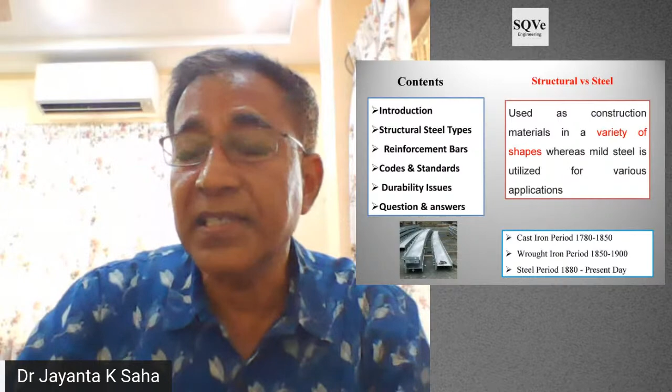Now with this, if you see the structural material definition I already mentioned, and the generic application of steel structures, it starts from 1780. There the heavy structures made of cast iron were built. I will show you some structures which were really made with cast iron, and are still surviving with full strength. Then wrought iron products were also developed parallelly. And then finally, we are talking about the steel period, where most of the structures are made with different grades of structural steel that we will discuss.

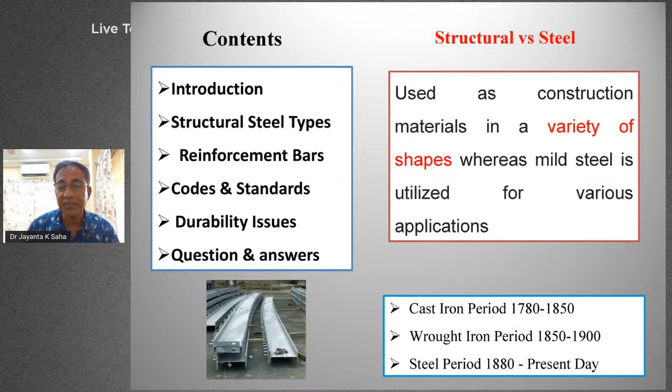Now, this is a very obvious fact. When we are going for any structure, there are four important things. We ask the architect, kindly give me a design that stands out from the existing structures. So we talk about aesthetics. The Burj Khalifa, anyone can like that building. If you see the tallest structure before that, it was equally elegant, but feature-wise the latest one may be more. So the continuous thrust is there, making structures aesthetically very pleasant.

That's why steel is one of the options, because you can make it in different forms, different shapes, and different dimensions. The second one is cost effectiveness, definitely, otherwise the material will not be sold. And then the third and fourth are the safety requirements and durability, that is, the maintenance free life of the structures.

So in all four of these most important aspects, the common factor is the material. If the material is good, and you give a good durable coating on the material, durability is high. For safety, if the weld material is good, then the structure has more safety. If the fireproofing material is good, then the safety of the structure is also good. So the common thing is the material part.

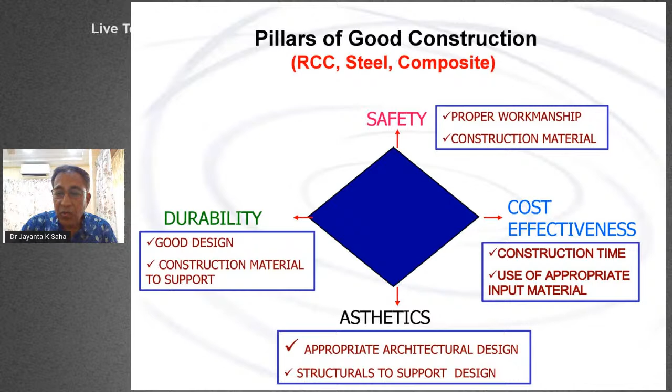And if you see this historically, starting from 1779, the structures were very bulky and aesthetically not elegant. Then in 1974, the Sears Tower, now called Willis Tower, in Chicago, USA, was made with medium strength structural grades of steel, 250 and 345. Now think about India: we are still following a maximum of 250, and there are limited cases where people go for 410 grades of structural steel.

The reason behind what I'm showing you is that the higher the grade of structural steel you use, the lower the material consumption of the structures will be. But there is again a chicken and egg story: these high grades of materials are not available off the shelf with the steel manufacturers.

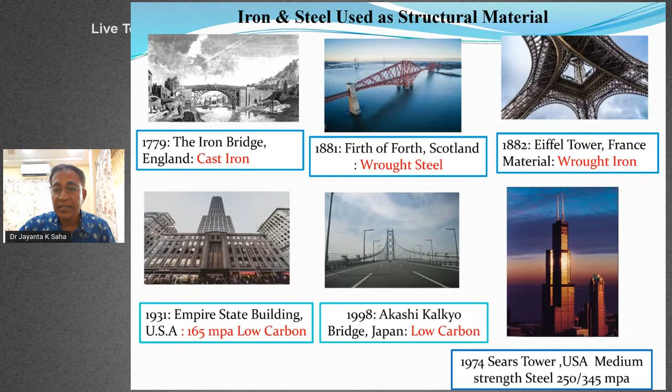That's what I am not using. But on the other side, the steel makers say that if you give me a lead time, I'll make steel up to 650 MPa values as per 2062. Think about the 2062, there are grades we'll discuss, but we are still at the entry level. We are operating most of the design activities at the entry level of materials as per the codal provisions.

Now the structural steel classification, I have made it in two. One is the plain carbon and the alloy steel. In the plain carbon, it starts from the carbon level up to 0.25 and 0.25 to 0.65. So here again, mostly the reinforcement bars are falling. 0.3 is a higher range of carbon, and other structural steels are mostly within 0.25.

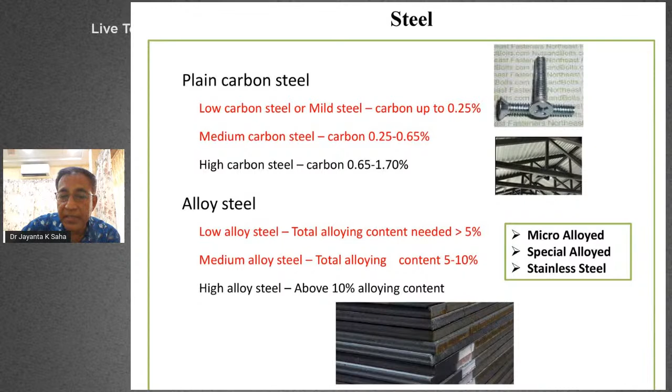And other structural grades of steel, when we talk about the alloy steel, if it is more than 5%, here we call it like HSLA, high strength low alloy, fire resistance steel, weathering steel. All these are coming under low alloy steel. And the medium alloy steel is like stainless steel, maybe the duplex grades that we will discuss subsequently, a little bit on that. And I think there are a few questions also on both the topics.

Now, at the beginning, when we are making a tender document, what should we look for as an owner or as a professional? The first thing is the quality considerations of the material. So the architect has given you the material attributes. These are the materials. The UTS value should be this. The hardness should be this. Bendability property, or if it is a dynamic structure, it should be the fatigue loading or the fatigue life of this. Then weldability aspects, all those things are defined.

Now, apart from that, as my friend Mr. Bhavin has already told, after the pre-feasibility, we go for the basic engineering. And in that basic engineering, there are certain questions you have to ask. These are the questions I have just put here. The first one is the chemical compositions. We have to find out from the major manufacturers. Nowadays, these things are available on the website. These grades having what chemical compositions.

The two important issues here are the residual impurities. The quantity should be less, the gaseous content should be less, like oxygen or nitrogen, and at the same time the trace elements. Then the homogeneity, meaning the micro and macro segregations. These are some of the attributes you can get from the material with eyes closed when you are buying this product from a reputed make, or where the technology has a very proven status. Okay, so this is the first one you have to remember. The other things I have just mentioned. If you are interested, you can get a copy of this presentation material. This can also be shared with you.

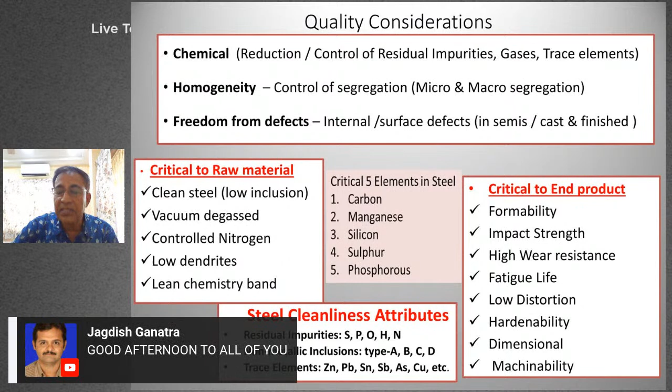And the last, not the least, is steel cleanness, impurities like sulfur, phosphorus, oxygen, hydrogen, and nitrogen. These things should be less. The quantity of this material will decide whether the steel is clean or it is unclean, defective steel. Thereby, the more cleanness of the structural steel you want, the more money you have to pay for that. So that is the thumb rule. And then other trace elements should be minimum, so that the steel will have properties like formability, impact strength, wear resistance, fatigue life, hardenability, dimensional accuracy, and machinability. All these things should be there.

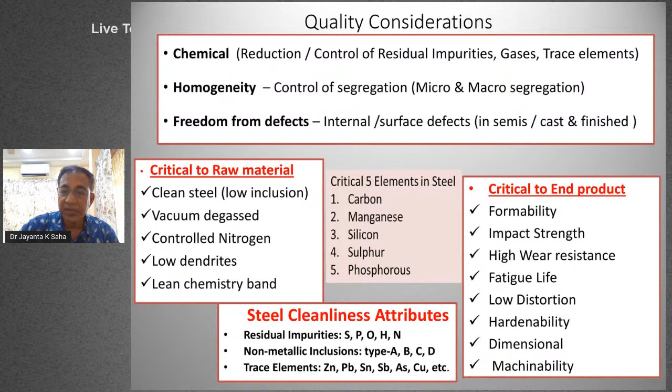The steel may be made by the best quality manufacturers, and you may be buying steel from the worst manufacturer. Outside appearance wise, both steels will look alike. You have to find out from where you are purchasing. So this is the technology part I am just explaining. This is the second issue you have to find.

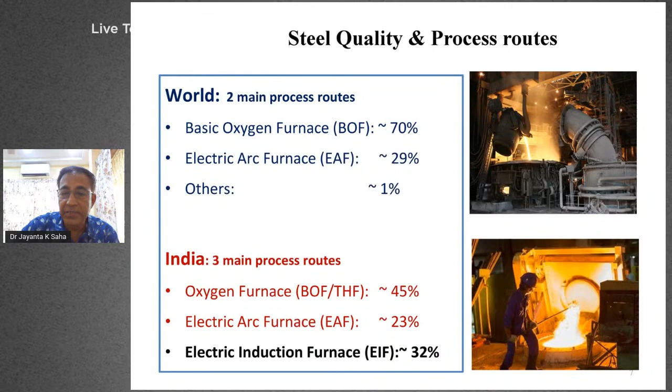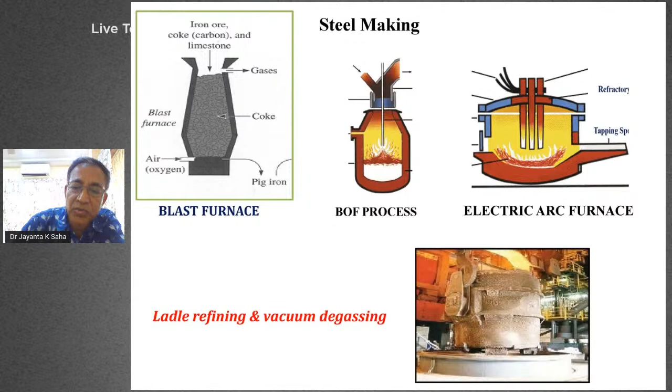This is some of the photographs I have. And if somebody is having an induction furnace process, there you have to ask for the ladle refining furnace. That is another add-on system, a costly process, but very often people go for manufacturing steel through the induction furnace route. So we should be very careful about the induction furnace route before selecting any material.

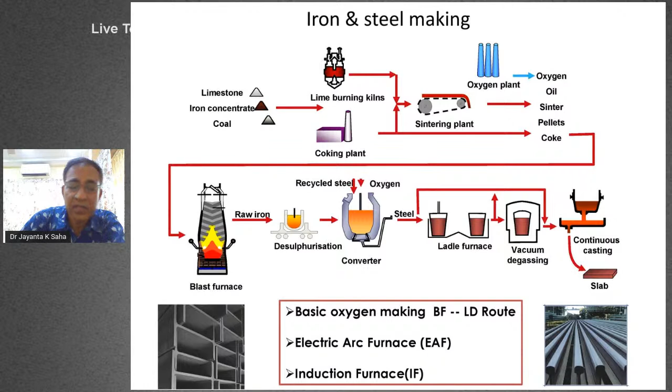Think about the integrated steel plants. I am just telling you, buy the steel from where they have control of the raw material, starting from the raw material to the end product, where you are getting the slabs or the final products. That means the entire quality, through various stages, the material has got a control, and steel has to have very good quality as required per the IS standard.

Next, the moment you are getting the slabs or the blooms or billets, those things are rolled. There is a question on why this rolling is required. Unless you get it rolled, through the rolling process you are basically trying to break the microstructures into a finer form, and thereby you are giving more strength and other properties to the material.

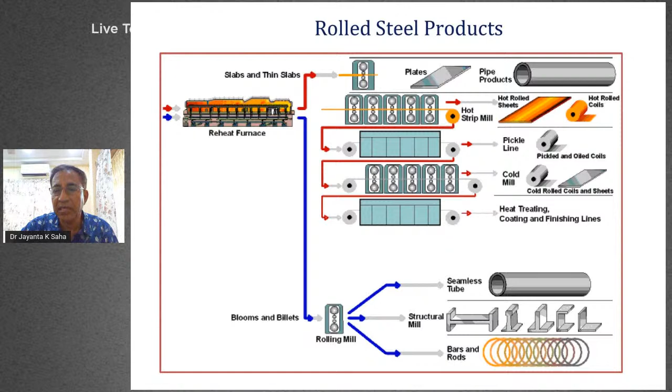This is also one type of heat treatment coming in the process. So there you can see these are the basic structural materials starting from plates. Then you can get various types of structurals like beam, column, I sections, and angles. There is another quality issue coming. I have deliberately put two terms: one is semi-finished, another is the final product. Semi-finished products are called bloom, billets, and slabs.

In the earlier slide, I showed you up to what stage the material is cast. And these cast materials have to be as per IS standard 2830 or 2831. For the better material, like IS 2062 structural grades or IS 1786, the reinforcement bars, it has to be rolled out from blooms or billets of IS 2830, not 2831. So this is basically the difference. You have to find out from the tender document, or you have to mention in the tender document, that the material has to be rolled from the semi-finished of IS 2830.

It should not be from IS 2831, because IS 2831 is for the low grades of structural steel, and for the general structural grades it has to be rolled from 2830. So I have given that in the definition here. Kindly note it down: IS 2830.

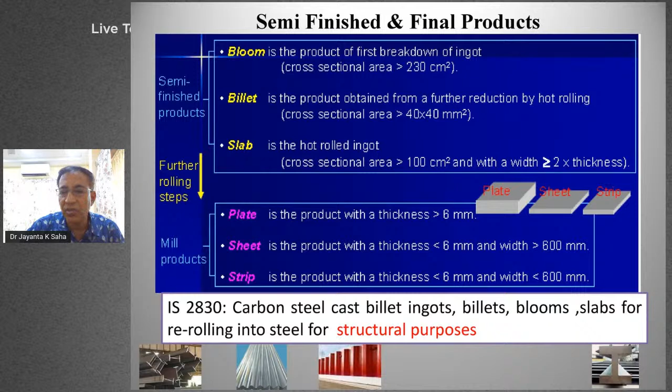And then the material, after coming out as a semi-finished product, you need to have control over the microstructures that you have obtained through the melting process. Then comes how we further increase the strength or improve the property of the steel, in terms of yield strength or any other property required for the product. There are two other processes. We call it heat treatment, that means heating and cooling the steel.

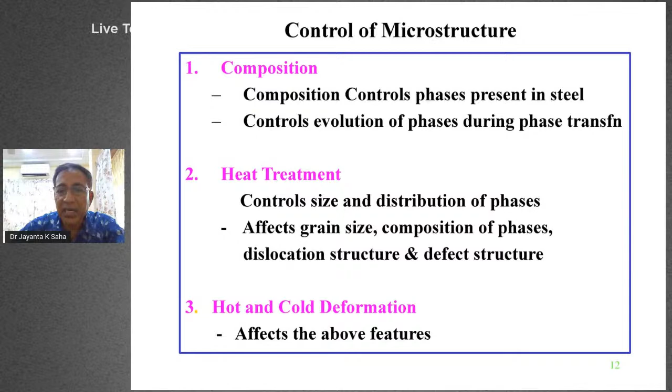For structural steel, normally we don't do separate heat treatment like tool steel. It is through the rolling process that the heat treatment is done. For the reinforcement bar, when you take the bar out from the mill, the heat treatment is done through the quench and temper process. Sometimes we call it the QST bar. So this is how the heat treatment process works. And from that heat treatment, and the deformation by various types of rolling, hot rolling or cold rolling, you get this type of microstructure.

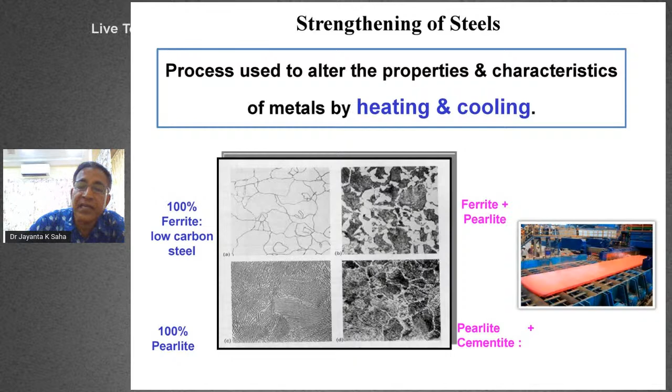There is a very complicated chemistry behind it, and that is the job of a metallurgist. So I will only mention here that depending on our requirement, we get various types of low carbon steel, where you get 100% ferrite, 100% pearlite, and combinations of both. These basically contribute to the specific property of the material. So you can see at the microscopic level how it looks. The outside of the steel looks the same, but the moment the structures are different, and these structures are obtained through various processes.

This is again a typical rolling technology where the slab goes to the final product, and as I have mentioned in the earlier slides, various types of microstructures we are attaining, and there are various types of rolling process. Now for this rolling process, in the tender document you have to mention that structural steel as per IS 2062

of 250 MPa value, and then you have to write whether you want grade A, grade B0, or grade BR, or you want grade C. As you go from A to C, the weldability quality increases. Then if you are going for the BR, that is the impact value at room temperature. Suppose you want to use a steel in a place like Leh, then you need a sub-zero temperature application. So the impact value of the steel has to be minus 70 or minus 80. Thereby you have to go for the third category, that is less than 0 degree.

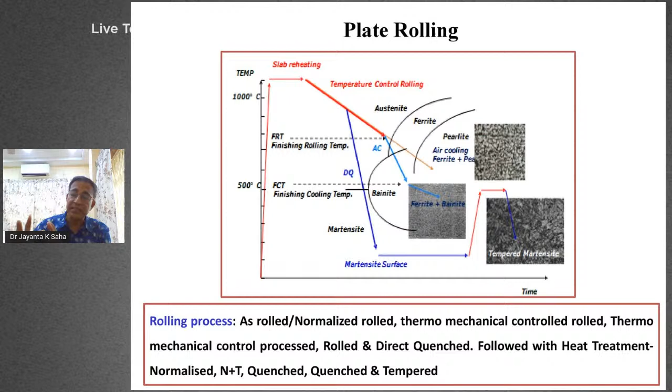So that's how, and at the same time, the quality of the steel you have to define with the heat treatment process that we write as rolled, normalized roll, thermomechanically controlled roll. So there are various processes. The moment you open the catalog of the major steel manufacturers, you will find all those things written at the side of this product. So you have to be conversant with what heat treatment procedure I have to follow for my product. So this is how through this rolling technology you get the microstructural changes and orientation.

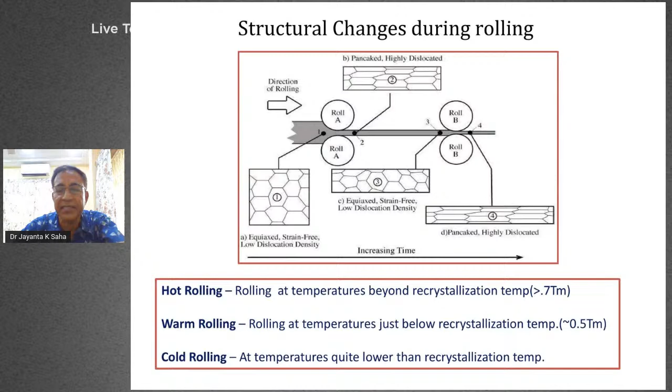Just to make you understand more what I said in the last two slides. Now you see, for structural grades as per IS 2062, a very interesting fact here. You see, starting from 250, 350, 450 and 500, 550, the variation of the chemical compositions is not much. You can see the carbon is 0.22 to 0.20 in some places, manganese 1.50 to 1.65, and the sulfur and phosphorus levels are almost the same. These are all impurities.

But with this, you find the carbon equivalent is starting from 0.39 to 0.54. So the lower the carbon equivalent, the better the weldability. But these are all weldable materials. And then you can see the percentage elongation. With the higher grades of steel, you have a lower elongation percentage. But the chemical compositions are not varying much.

Then what is the process? As in the earlier presentation I made, through the heat treatment process you get all those things, the TMCP or NR, FN, all those things I mentioned. Through that, we increase the strength of the material, and this consumes a lot of time. That's why the cost of the 250 grade of structural steel is much lower compared to the 450 grade. If you see the ingredients, it is not much different, but it is the time which this type of process consumes that makes the product costlier with respect to the lower grades of steel.

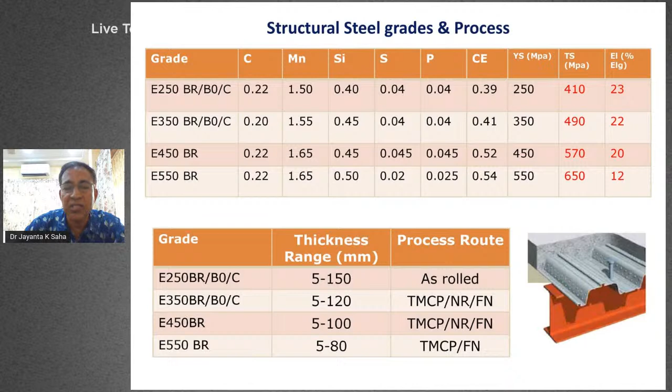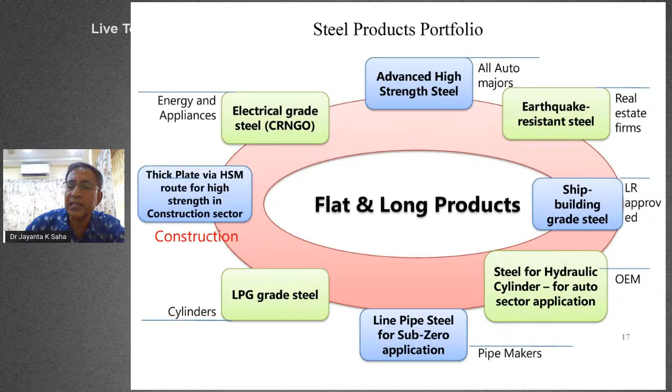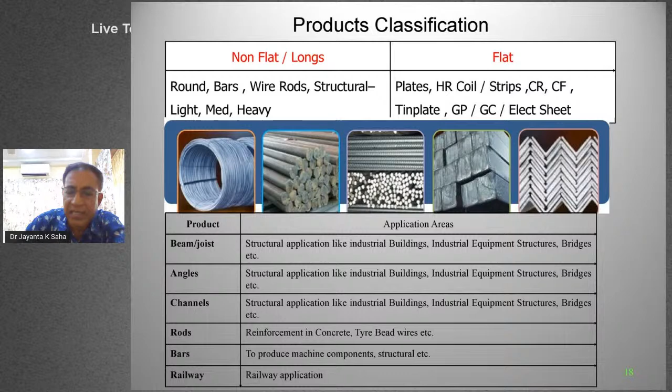Now the structural steel, in the portfolio, has two definitions: the flat products and the long products. And in the structural construction areas, this is the area, and the other area is the earthquake resistant steel or the special grades of steel. Those come under structural grades of steel. So I will not read into this. You all know. I'm just making you understand the definitions, and these are the structural sections, and there are some applications. These are also some photographs of how this product looks.

Now about the plain carbon steel, we learned a little bit about the basic requirements, how to choose, how these different types of grades of materials are developed, and what we should write in a tender document. Now you have a challenging situation where plain carbon steel will not serve the purpose. Even the coating on the plain carbon steel is not lasting. I am talking about galvanized. I am talking about the various types of organic coating.

What is the way out? The option is you have to go for the medium alloy steel, that is called stainless steel. Now the stainless steel, by definition, has a certain amount of alloying elements like chromium or nickel. That's why it becomes rustless. In the other case, we get a rust layer on the top, and continuously that rusting increases, and thereby you lose the steel. But in the case of stainless steel, there is a rust layer at the top, but this top layer we call the passive layer. That means it is not allowing further corrosion.

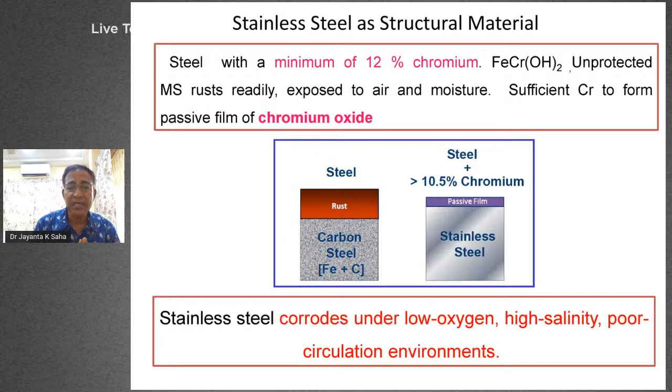But the stainless steel, when we are using it as a structural material, it is not only one grade which serves all the cases, because I have mentioned here it also corrodes in low oxygen, when the oxygen supply is very low. In the case of the marine climate, where chloride ions are very high in the atmosphere, or poor circulating environments, or the area is very stuffy, there the stainless steel also starts corroding.

So that makes it challenging. What type of stainless steel should I use? In normal case, we know the austenitic stainless steel, ferritic, martensitic, but there are various applications. But for the construction activities, you can see that these are the stainless steels used, and this is the area where the stainless steel is used. This is a composite type of structures. There you can see there are two grades. One is the austenitic, the other is the duplex.

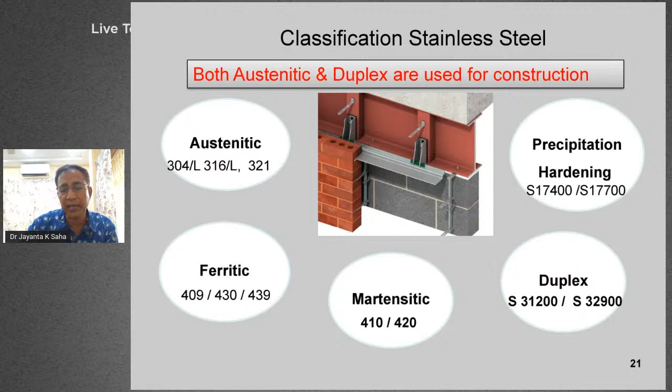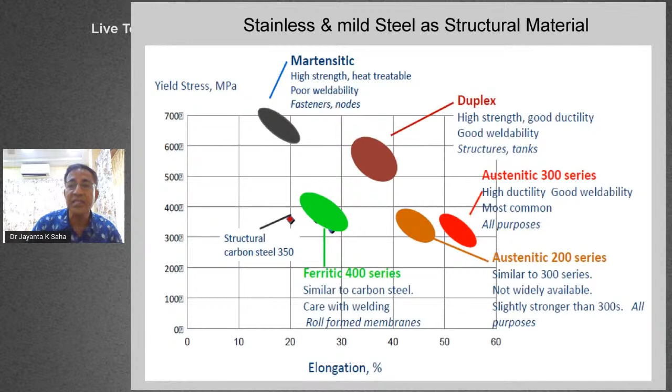And nowadays the duplex stainless steels are very popular, and these are the series. In duplex stainless steel, we have the 6603 code earlier, and then we have stainless steel duplex reinforcement bar codes also. I'll be mentioning that code number also. And here, apart from the corrosion issues or the service condition, another important reason is that the stainless steel duplex grade can replace the normal structural grades with half of the material, or even less than that. Because the strength class you can see up to 600, when we are using only 250 or 300 grades. But the stainless steel series itself is of higher grades.

So now that is the second option, the plain carbon steel, and then you can go for the alloy steel, or you can go for the low alloy steel, as I mentioned, weathering steel or fire resistant steel or earthquake resistant steel. So depending on its application.

Now, coming to whatever I said, the question automatically comes to our mind: how do I find out? You said go for the good technology, go for the good product. How do I find out from the market when I'm seeing everyone showing their brand on the televisions? We are making the best quality of the TMT bar, earthquake resistant, structure will not collapse. How do I find out whether they are really good or not?

So the Government of India, the Ministry of Steel, has started a campaign called the branding of quality steel. Like the logos you see for veg, non-veg items or the seal mark, the steel has also got the ISI mark. Now go to the BIS site. There is a database. You write down the TMT bar, IS 1786, diameter 10, grade 500 or 550D.

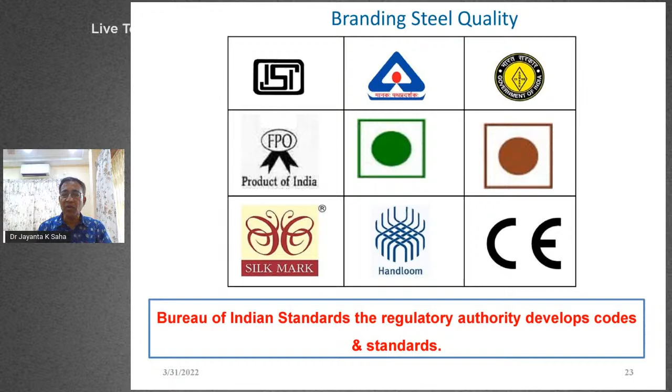Who are the manufacturers? It gives a list, because it is not only one company that makes only one type of rebar. From the database, you will find out the fleet of all the products, like 550 grade. Suppose the manufacturer makes starting from 10 millimeter to 25 millimeter, you will get all the incremental values, whether they have got a license or not. So that gives you more confidence. The product has certain inbuilt quality assurance, because BIS has surveillance on the products.

Some of us may not know that for non-critical applications, you should not use the 2062 grades of steel, because that steel is costly. There you will find another code, that is 15911, which is used for ordinary quality or structural steel. That means suppose you want to make a small unit in a structure which doesn't carry much load. There you can use this type of material as per this code 15911. This code is not a very old one. It has been reaffirmed in 2020 or 21.

This code, starting from 165 MPa value of steel, has gone up to 250. There are 3 or 4 grades. So why unnecessarily waste when your requirement is served with the 165 MPa steel? Then the other type of steel we very often neglect is the weathering steel, that is 11587. This weathering steel doesn't require any type of coating, provided you know the proper uses and the environment where the structure will be situated. It gets weathered with the environmental conditions. But the basic requirement is that there should be a wet and dry cycle.

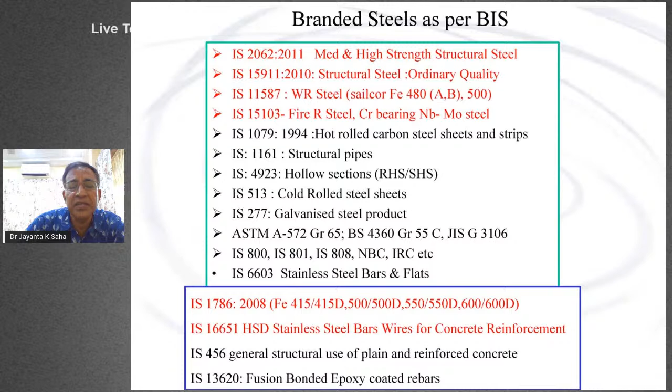The only thing is that there is a cost involved, but the maintenance cost is almost zero. The other one is the fire resistant steel. In India, only Steel Authority of India has got a capability to make fire resistant steel. But because of the exorbitant high cost, this steel is not very popular in our country. But if you search on the internet, you will find there are a lot of buildings in Japan, USA and Germany. They are coming out with fire resistant steel. So this is also a popular one elsewhere, but not in our country.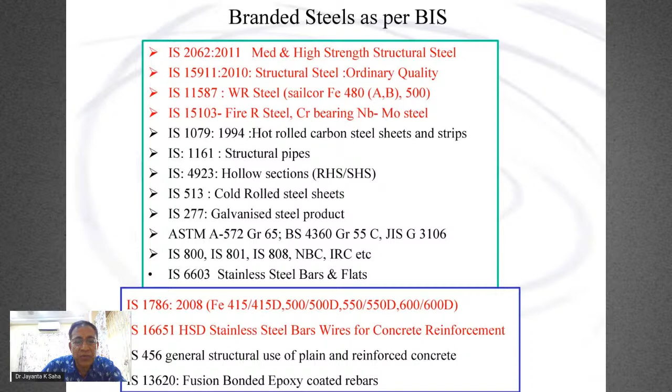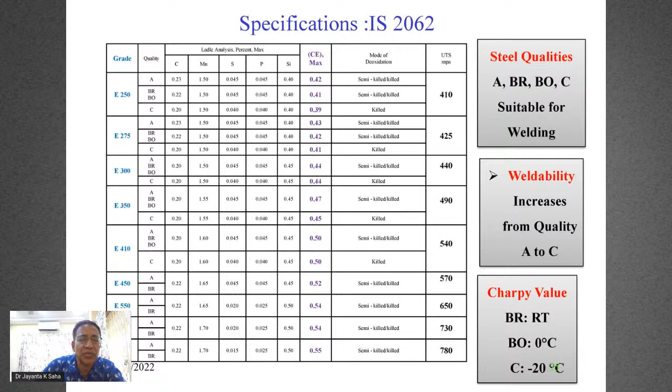Then you can see for high reinforcement part, I'm not discussing right now. There are certain codes I have just mentioned here, important codes. This already I have discussed, IS 2062. I said it is not only IS 2062 that I am mentioning. So IS 2062 has got 27 grades starting from 250 to 650. If you add up all those things, it comes to 27 grades.

So A, BR, BO, C in some cases, all three, some cases only two, A and BR. So impact value at 0 degree, we are not able to develop so far. So that's why BO is not there, or minus low temperature, it is not developed till now. So that's what you will find, the UTS value starting from 410 to 780. But the moment you go down from 300 below, there are not much applications. And the quality of the steel or the cleanness of the steel is decided based on the deoxidation of the steel.

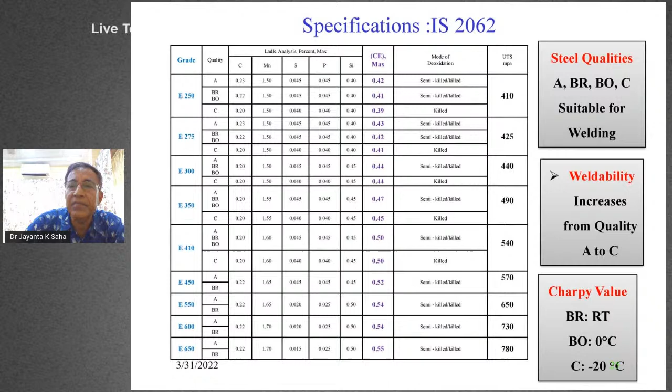Now we'll stop here on this structural steel discussion part. So there are four takeaways from this. Number one, when we are making the tender document, we should be very careful about what my requirement is in terms of the properties or the performance of the steel. I should be very clear about that. The second one, what grade I should look for, and the source of the grade from where I'm getting it, and then cross-checking with the BIS site whether this product is licensed to BIS or not. All those things will make the tender document foolproof, so that at the beginning you will find this material you are choosing is correct. So at the end you should not repent for that.

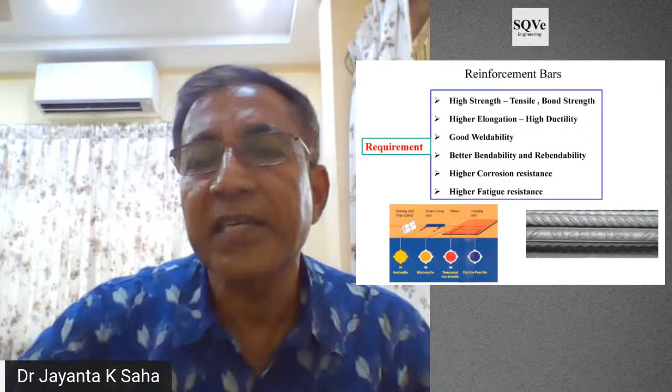Now with this, we go to the second part of that. It is reinforcement bar. As Mr. Bhavin already said at the beginning, reinforcement bar is again an important issue. In any developed nation, you will find the RCC structures have taken a backseat. Steel-based construction is taking the lead in that construction area. But in our country, it is a long way to go for steel intensive construction, unless it is a requirement. So people are not going for steel based construction.

So thereby the importance of the reinforcement bar for the RCC structures will be still more in the coming years. The requirement for reinforcement bars is, first thing, we should always go for the high strength grades. We all know as per IS 1786, it starts from 415. Then you have 415 normal grades. Then you have a seismic resistant grade, we call it S. And then you have a ductile grade, we call it D. So 415 normal, 415 S, and 415 D. Same way you go, next step is 500, then 550, then you have 600 grades.

And there are activities going on to make up to 700 grades. Two or three major manufacturers are in the process of developing 700 grades of TMT bars. So these are the requirements for the TMT bar when you are selecting for your tender document, that it should have a very high strength depending on the design parameters. I'm talking about the tensile strength. Then the bond strength has to be good. In the code it is mentioned what the bond strength should be, and then the higher elongation. Starting from the normal grade to the ductile grade to seismic grade, elongation value increases.

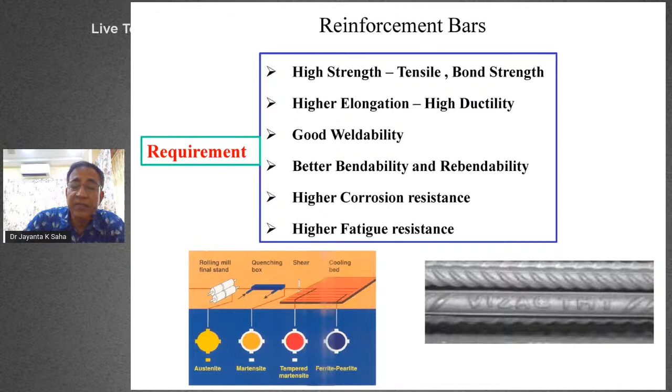Should I only use the plain reinforcement bar? Because you have a choice. Plain reinforcement bar, you have a choice. Among corrosion resistant reinforcement bars, you have a galvanized reinforcement bar, you have a stainless steel reinforcement bar, you have the fiber reinforced or the carbon reinforced reinforcement bar, that is the non-metallic reinforcement bar. So nowadays these are the issues, and there are a lot of conflicts in our mind about which one is the best. Again, unless you have a little knowledge about the subject, it is very difficult to select the right kind of reinforcement bar.

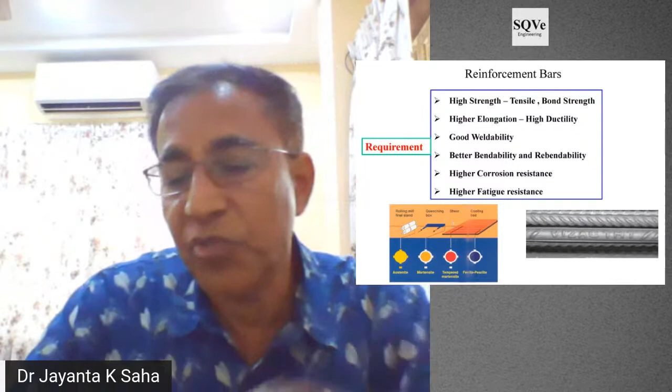Now this is a survey I made a few years back, drawing some reinforcement bars from various marketplaces in India, and then we analyzed them. As on date, there are 50 to 55 TMT bar manufacturers in India who make under license. But if you count all the TMT bar manufacturers in India, it may be more than 200 or so. That means the remaining ones have their own technology.

What is this technology? In the name of quench and temper, that is a very high speed line. That line will be a few 100 meters in length of bed, where the rebar moves at a very high speed with water quenching through it, so that you get two different microstructures: the hard outside structure, which we call martensite, and inside the core a softer grade, the pearlite ferrite. Instead of that, they are putting the bar in a tank, and the outside look is the same. But the moment you take the cross section and etch it, you will find the annular ring on the outside, which provides protection from corrosion, is minimal. So thereby the TMT bar will have more problems.

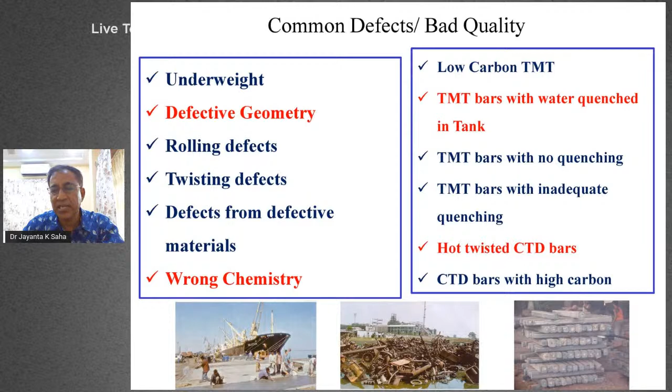So if you are selecting this type of material, it will be very dangerous for the structures. The structures will not give the proper performance as desired. This is IS 2830. I told you, this is used for general structural purposes, and it is low tensile. This is the feed material for both structural steel, IS 1786 and 2062. This is the grade of material as a feed material.

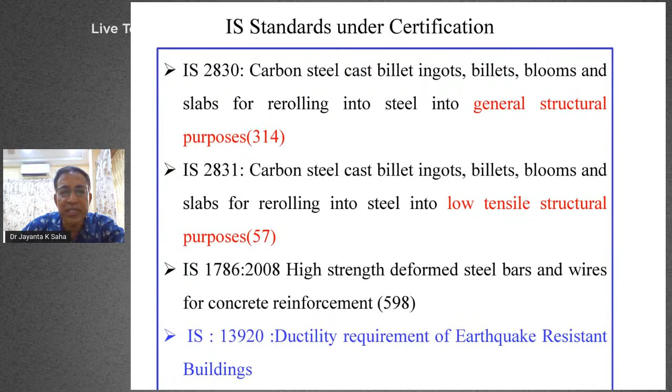So normally in a good tender document, it also mentions that the TMT bar or 2062 has to be rolled from billet of IS 2830. Kindly provide the billet test certificate. The MTC has to be provided with that. That means you will find this billet has been taken from Steel Authority, or from JSW or JSPL. All these people sell it to the open market for rolling into subsequent steel products. So this is very important. The first one, 2830.

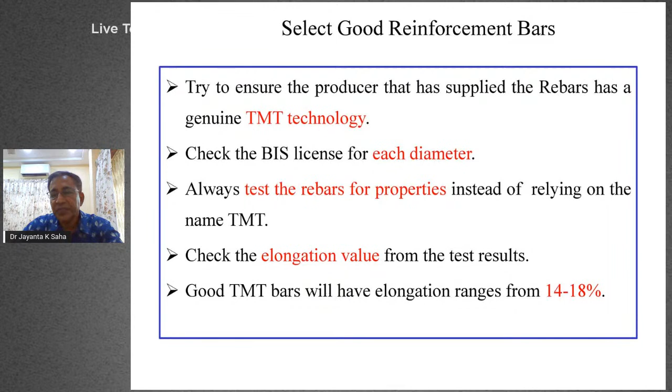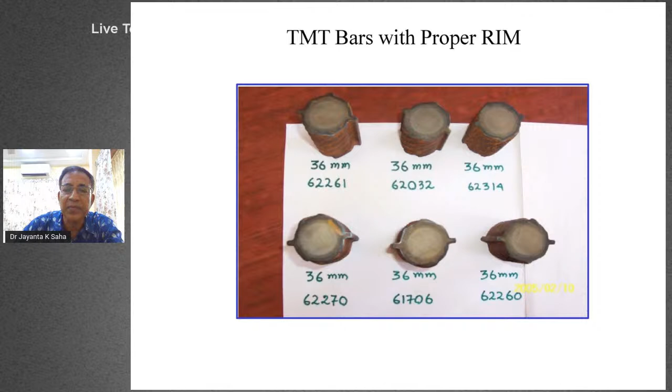And nowadays nobody is using 415 grades. I was talking about checking at the field side: take a piece and apply the solution available in the market, and you will be able to see a uniform annular ring. That means this product is good, and the ribs are also good. When the product is not good, you will be able to find that out from the field.

Now, you have selected good rebar, good technology, a good branded rebar, but at the same time, if you keep it like this at the construction site, you are inviting further problems for a good one, because you invite corrosion in that. I will just mention the difference between rust and corrosion. In a good construction site, this is the standard practice: they put some logs, and on top of the logs you keep the bars, and the end is normally protected, so that any water falling on it drains out from the site. That keeps the rebar good.

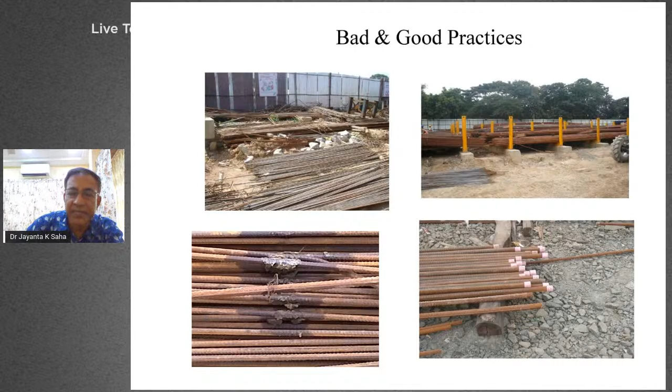There are cases I come across where the rebar at the site is rusted, so they ask that the rebar be rejected, because we cannot put it in the RCC. But for your understanding, the rusting of rebar is not bad. Rusting means at the top layer you will find some reddish colour powder. If you touch it with your finger, you will find the reddish powder, and it is called rust. Now, this rust is basically helping adhesion with the concrete. In the Indian code also, there is a clause added. It indicates rust as a phenomenon on rebar and not a cause for concern: rust, seams, surface irregularities, or mill scale shall not be cause for rejection.

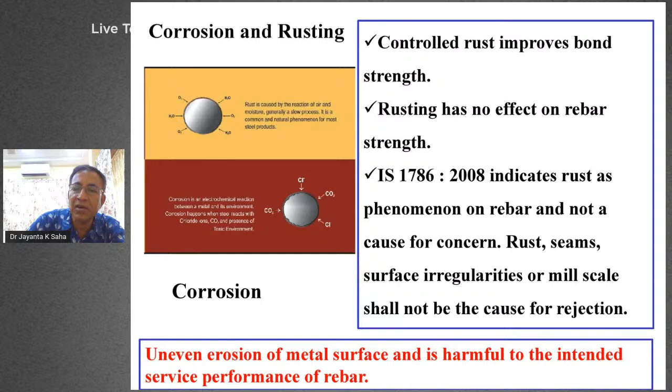There are many cases where rebar was rejected at the site due to rust. Singapore has done a lot of work on this. In the Singapore civil engineering code, they have specifically mentioned that rusting has to be done before you put that rebar into the system, because that makes better bonding with the concrete.

When the rusting is severe, you add other ingredients so that it starts pitting, then it becomes corrosion. So corroded steel is not allowed, because that is the area where some electrolyte gets entrapped in the system. The moment it goes into the concrete, that electrolyte will start acting and the rebar will get corroded faster. So these are very clear definitions of rusting and corrosion.

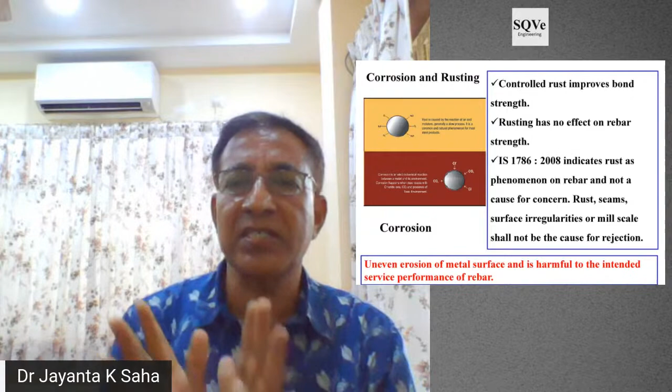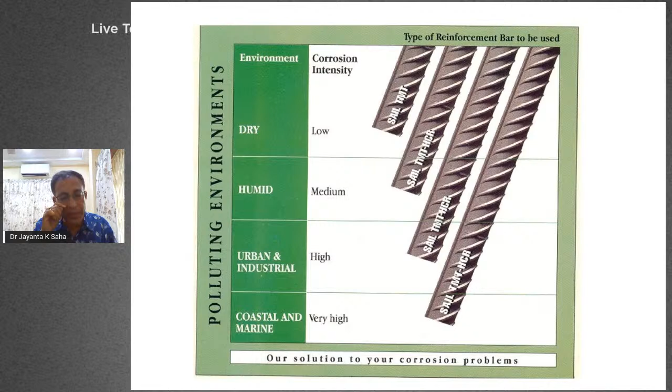So, another one or two slides, then we will take the questions. Like steel structures, the protection and durability depend on the environment where it is. Suppose I want to put a structure in Rajasthan in a hot, dry climate, or in a place like Cherrapunji, the highest rainfall area, or Mandapam. Definitely, the structure's protection has to be different.

There is a logic for that, and there is a lot of data to support it. You can apply those things and make the structures free from maintenance for 5 to 25 years of life, depending on the severity of the corrosion.

The same way with rebars used in concrete. The concrete envelops the rebar but does not fully protect it, because concrete is always a porous structure. Through this porosity, it continuously breathes in carbon dioxide, which makes carbonic acid, or chloride ions, which make hydrochloric acid, or sulfur dioxide from fossil fuel, which makes sulfuric acid. All these acidic components slowly go in and touch the rebar, and then the life of the rebar starts coming down.

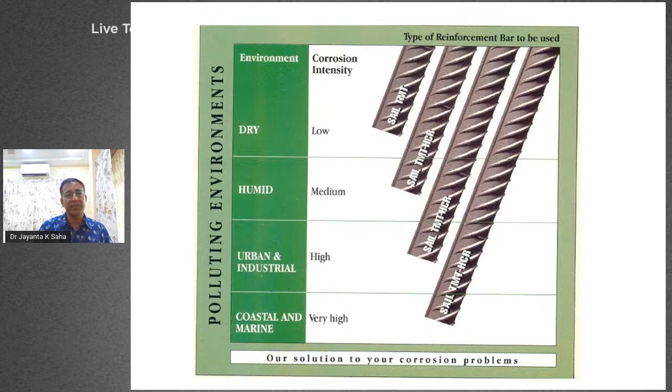So there are various climatic conditions. You have to select the normal TMT or corrosion resistant TMT, or the various types of coated TMT bars, so that you can plan for this type of uncertainty. Because today your structure is in an urban area, but 50 years down the line that area may become very populated. There will be a lot of emissions and pollution, then the structure will start breathing these gases and will be vulnerable. The structure's life will come down.

So this is my concluding statement. Information on steel metallurgy is very much required as a professional, because metallurgical engineering is no longer the baby of metallurgists. It is a starting point for civil engineers, mechanical engineers, chemical engineers, even architects. So you need to know a little bit of metallurgy when you are dealing with materials. Different types of structural materials are available, from plates to reinforcement bars, in various structural grades. And I have mentioned the codes.

The code of practice is IS 800, then IS 802, 808. Selection of the steel with respect to quality is important, and structural steel has challenges too in terms of corrosion, fireproofing and seismic applications. And the durability of steel structures should always be considered, unless otherwise called for. Okay.

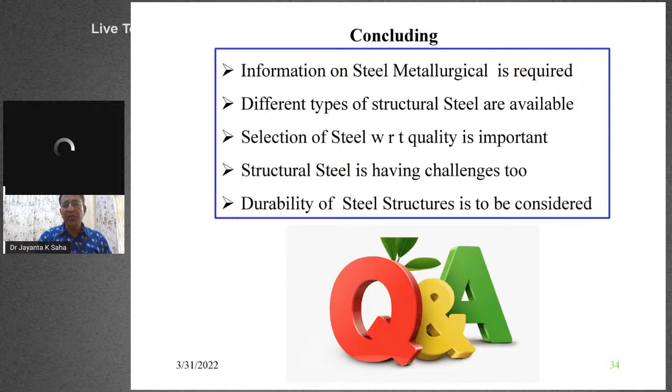Now, Mr. Bhavin, we can take some questions. Yes, sure. Excellent presentation. You have touched upon a few very important points which were generally not discussed in practice. So let's take a few questions now.

Abhishek Singh asked during your presentation about primary and secondary steel. Is it dependent on the making process?

See, I do not believe in primary and secondary. It is a very age-old concept. We call them primary or integrated steel plants because traditionally they own the mines, those who came first. They have iron mines, coal mines, and limestone or dolomite. They start from making iron and then convert it in an electric furnace, making it into steel.

But when a person started a business some 20 years back, at that time there was no owner for these coal mines or iron mines. They did not get anything. So how do they do the business? They either take blooms or billets from the major manufacturers, and they put more investment into the technology part of the steel making.

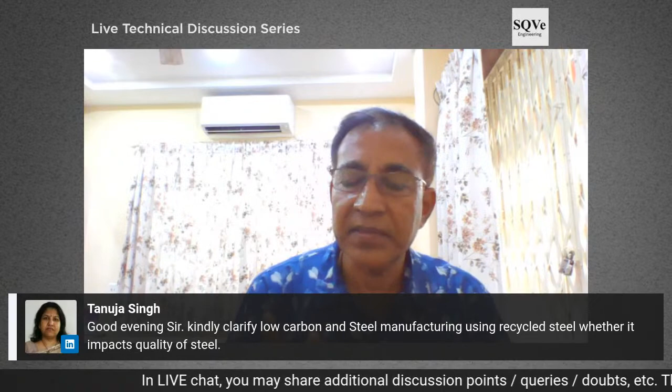Now in the electric furnace, the advantage is, irrespective of the feed material, you have a chance to refine it. Through the refining, you can bring the desired chemical composition. So whether you are charging recycled steel in the electric furnace or somebody is making virgin steel from iron ore, it doesn't make any difference in terms of quality, because the electric furnace is followed by other methods like vacuum degassing or maybe the LRF coupled with that. So if you have that setup, even with a small establishment, absolutely there is no problem.

Abhishek is asking that we design welded connections in seismic areas in the case of structural steel buildings, but for RCC buildings, welding of reinforcement bars is generally discouraged, and we prefer laps and couplers. So can you please throw some light on this? Why welding of reinforcement?

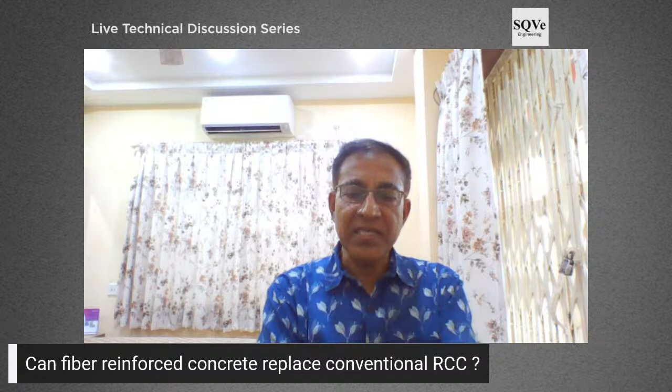That means with respect to temperature, if the temperature today is say 25 degrees in Delhi, and in the summer it is 60 degrees, even then the steel will not behave differently with time and temperature. But this type of fiber material gets permanent deformation. So one is the impact, the other is the creep, and the third one is in case of

earthquake. This is very common sense. In case of earthquake, the structure has to shake. There will be sway in the structures. So steel is the only material that has equal tension as well as compression. But this type of material doesn't have that. So that is the third dimension added. All those uncertainties you have to foresee, and only then go for that.

So in my understanding, for critical structures, structures of public interest, definitely it is not. For your own structures, you can try with that. A one-story building, two-story building, nothing will happen.

Yeah. Professor Mainak Ghosal is telling India loses around 5 to 7% of its GDP per year, let's say, due to corrosion. Carbon nanotubes are very efficient in resisting corrosion. So I mean to say, at what steel production stage CNTs may be added?

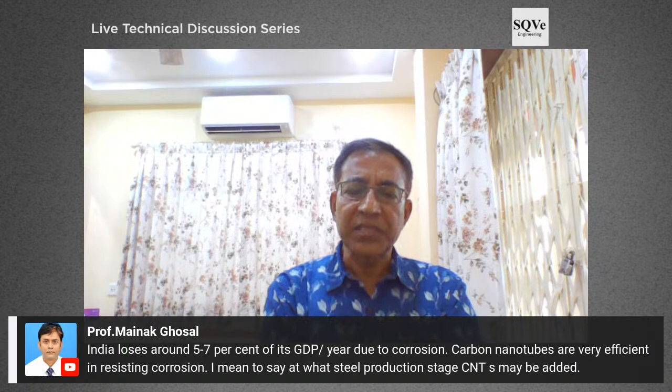See, this carbon nanotubes, a lot of research is going on. So this is again application-wise, as you said, that colossal loss of GDP. In a developed country like USA, it is 2.5% of the GDP loss. In India, it is what you said. It is more or less the same. So in that case, with this new technology, it is something like the story of electric car versus petrol car.

So technology-wise, it is good, but for limited application. But the production cost, so in the steel plants, their basic business is the volume of production because of the requirement. So I don't think in the next few years carbon nanotubes will be an efficient commodity or material for the corrosion mitigation process. The conventional methods are cheaper, in terms of various types of coating, metal coating or organic or inorganic coatings. So that will still dominate. There is a lot of research, and the cost part has to be taken care of.

Okay, so thank you for this informative session, sir. Can you please repeat the difference between rust and corrosion once again?

Yeah, rust is basically on the steel surface. When the steel is coming out from the mill, after descaling, you will find it looks very shining. Now, the shining surface, the steel has at the top layer, in the microstructures I showed you, very fine grains, and in between the grains there are what we call the grain boundaries. And now when there is availability of moisture, that means water H2O, or the presence of oxygen, when it touches the steel surface, you get a composition we call Fe2O3, the oxides of iron, and Fe3O4. So these are the materials.